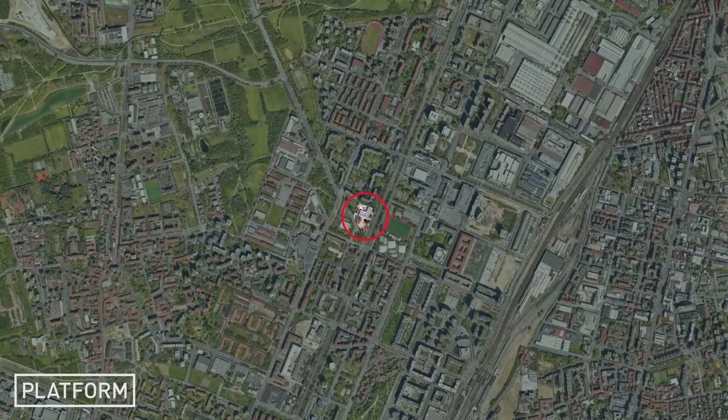I'm going to show a project that we are going to build in Milan area, around the Pirelli area in the northern part of Milan. We are talking about the idea of togetherness because this is an abandoned building. So the idea is now trying to give a new life to this building.

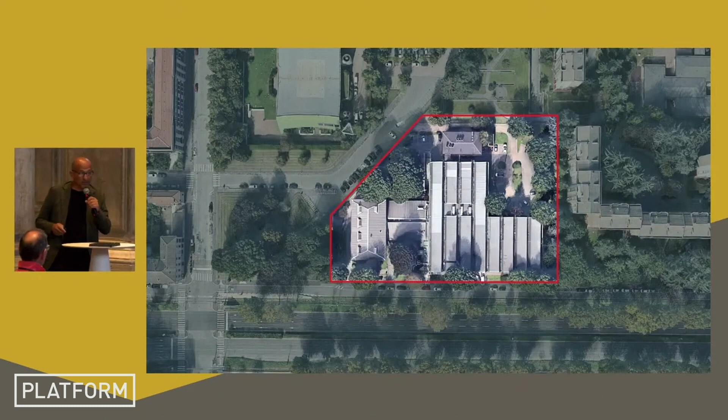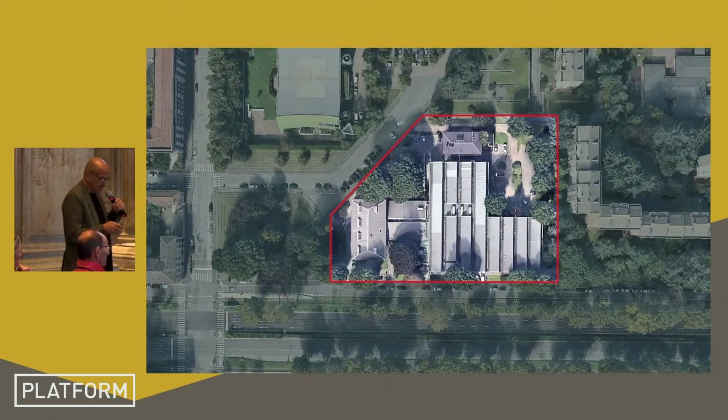It's a quite strange building because it was built in 1958 by Roberto Menghi, a famous Milanese architect, with a specific nature, because this was a school, but at the same time a factory. All the students, the young workers of Pirelli, worked and studied at the same time. The first building, the L building on the left, was a school, and the other was a factory.

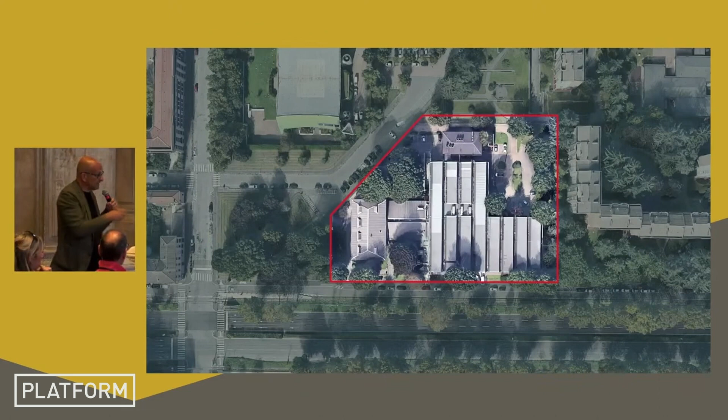So we have this strange nature of the building, which we found around 3 years ago. A fantastic place with very good trees, and this on the left was the building used for a school, and the other as a factory.

But what happened over the years is that Pirelli abandoned this type of content and used this building as a training school, transforming the inside completely, adding a lot of elements not coherent with the building. So you can see the new doors with a different level inside.

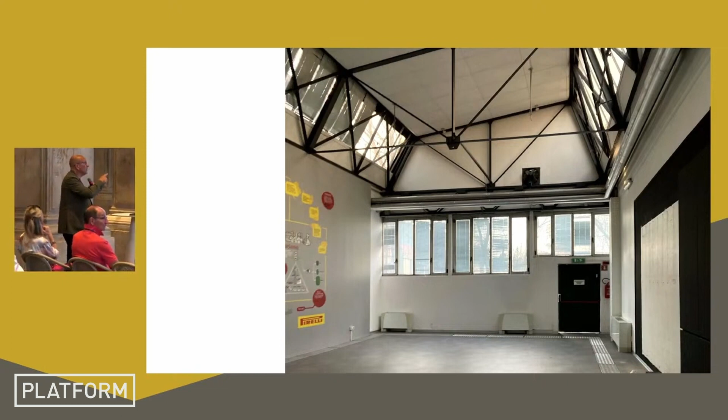Also the flashing on the top is completely different from the original project. And inside, the building was divided into small rooms, burying the original fantastic space that we have.

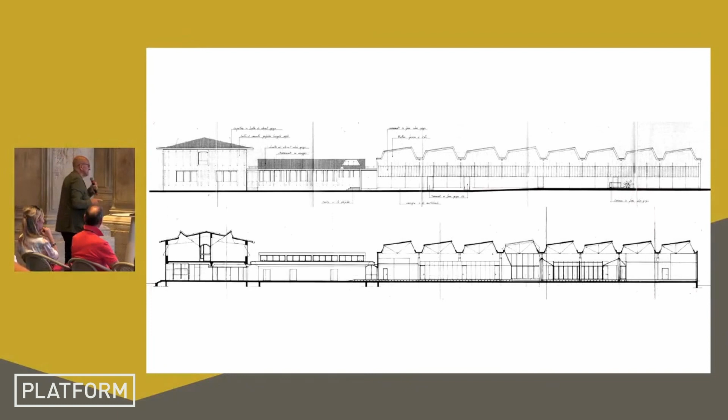This is the space that we found, with completely different elements. What was very interesting in the factory part was the roof, made with this very thin metal structure.

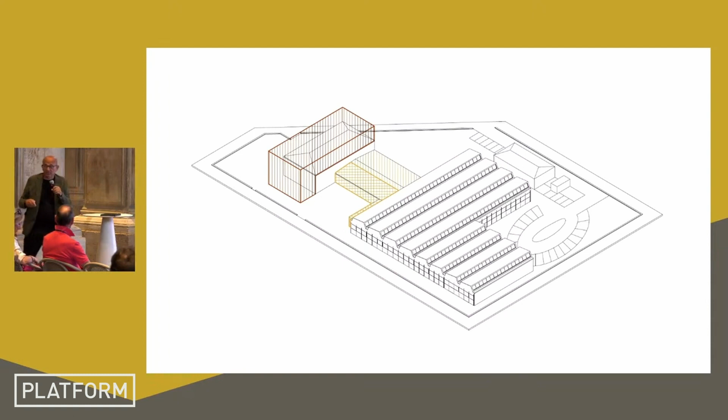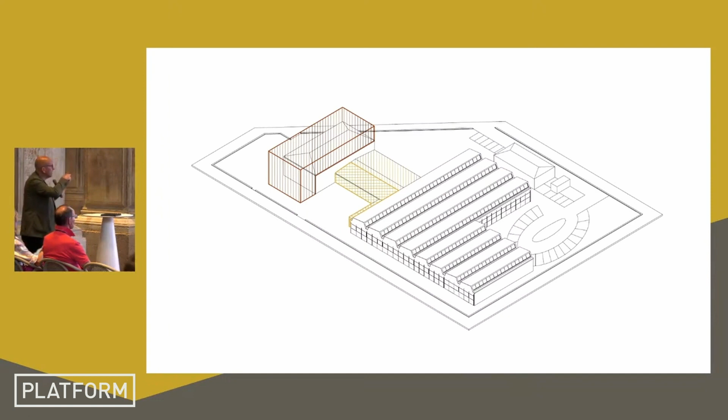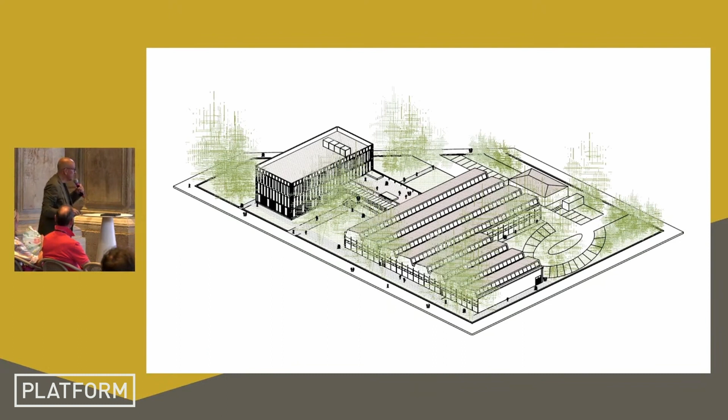The other area also transformed the connection between the two buildings, creating a sort of new collective space. This is the new plan. What we did here was graft some blocks of services, you can see 4 of them, leaving the space completely open. You can see this better here in this plan.

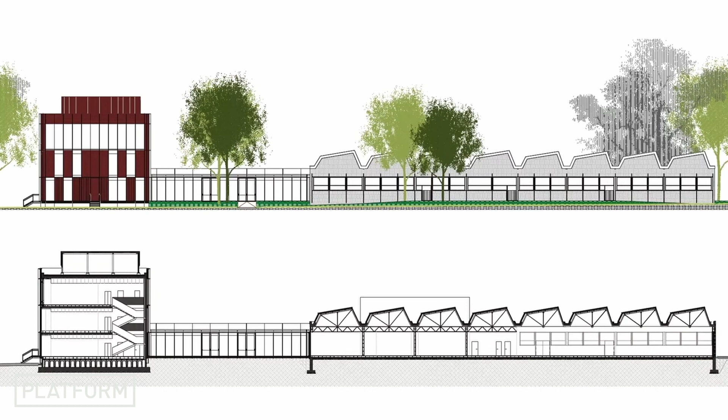Going on, you can see that what we transformed was the idea that we have a vertical element in contrast to the horizontal of the factory. So we create a new balance between the two volumes.

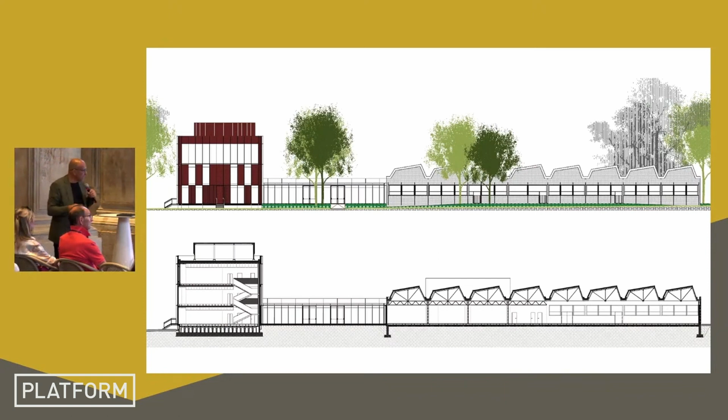We thought that the original building had a very strong character, but at the same time a sort of domesticity. So we tried to give the building a sort of sense of place, an idea of being very site-specific. We tried to give the new building a more industrial character.

This is what we did, a sort of palace with the typical idea to create three elements: the basement, the central part, and the crowning of the building, like in all classical buildings. But we think this has a memory of the industrial character of the Pirelli area.

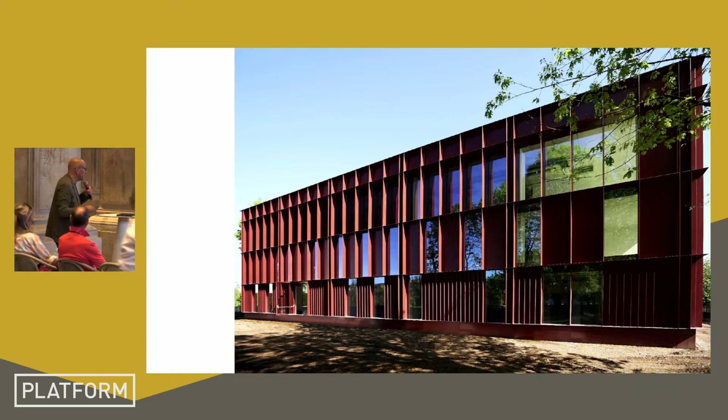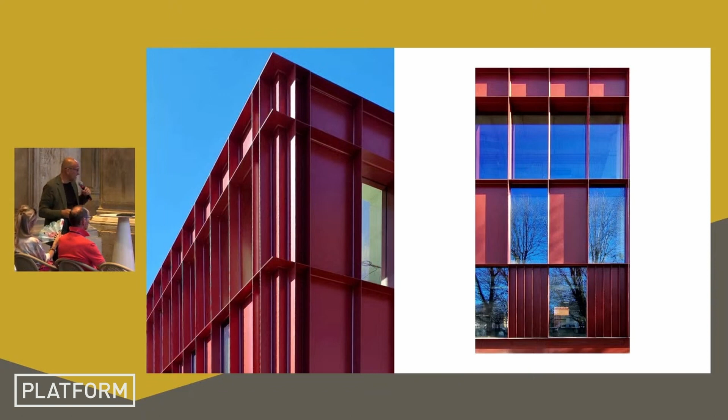Now we are going to end the garden, but this shows how we transform the main facade of the building. We used aluminum, a standard aluminum system made of blades of aluminum, and tried to create a sort of hierarchy between the parts of the building.